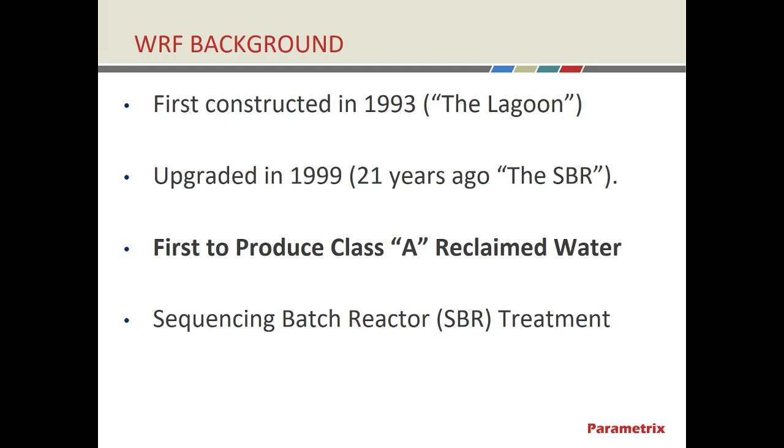I mentioned the letters from ecology. If those continue, you're at risk. I don't know that this is going to happen, but you're at risk for fines or potential third-party lawsuits, and some type of enforcement actions from ecology, growth restrictions, or basically just the inability to treat wastewater, which I think is the biggest concern here.

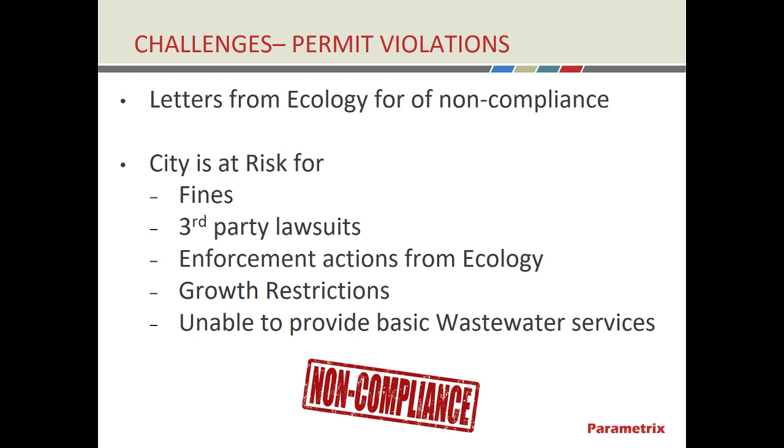So in terms of permit violations, in order to discharge to the river, you have to have a nitrogen limit of 10 milligrams per liter. The red line is the permit limit. I apologize for the small scale. January of '15 is where the graph starts, and it goes until June of this past year, June of '19. Those are monthly reports that your staff has to turn into the Department of Ecology every month. So that's exceedances for nitrogen and turbidity, which is particles basically in the wastewater.

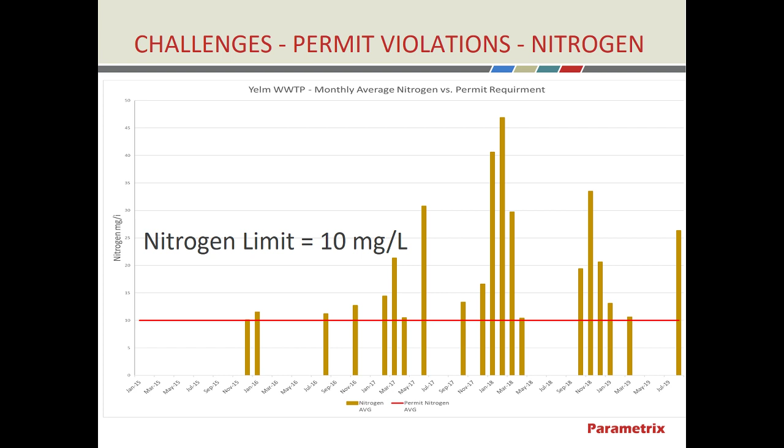Turbidity - in order to be a reclaimed water producer, you have a turbidity limit you can't exceed. Those are your exceedances for turbidity, and coliform. You can see that even right up until the end of the period, you're still having issues.

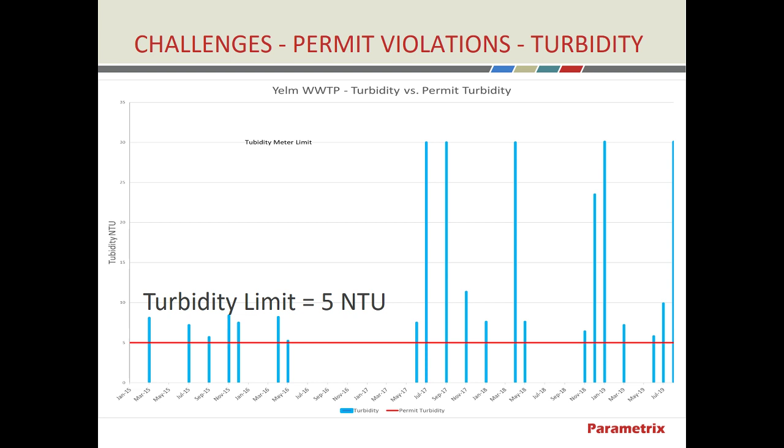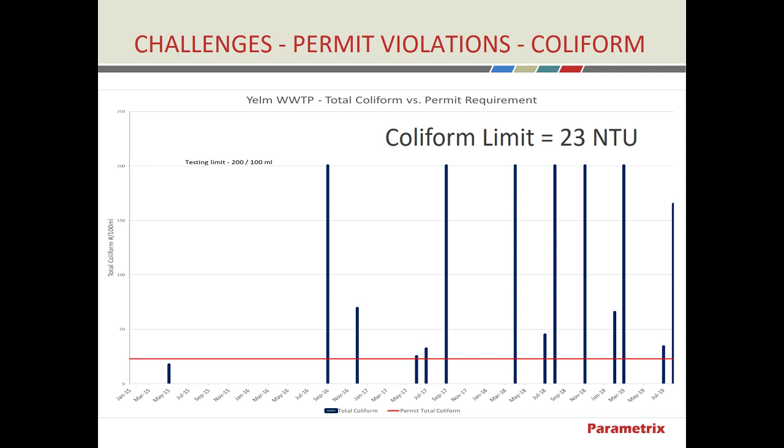Throughout the process, though, we have been working on some things to try to manage this, which I'll explain in a second. But when you have an aging plant - some of the pump stations out there, part of the lagoon plant, are 27 years old. We'd love to design things to last 27 years, but they just don't last that long. When you buy a car, you do everything you can to take care of it, but sooner or later maintenance just starts creeping up and you're doing more and more.

You mentioned we were the first to have reclaimed water in Washington State. Were there any other cities or municipalities right after us, within 5-10 years or so? So right down the road, LOTT produces reclaimed water. So what do they do when their plant breaks down? Do they have issues? They have a much larger facility, so they have a larger staff.

They have a different process. Staying on top of it, though, from the standpoint of equipment, is also about having the ability to exchange parts. With an old car, sooner or later you reach a point where you just can't find parts for that car. And that's the situation you guys are running into.

So are we unique in the kind of how our plant runs then and operates? Yes and no - an SBR is a common process. We do a lot of work for the city of Orting. Orting also has a batch reactor that they're looking at right now, making major upgrades to as well. It's just at that age where it needs work.

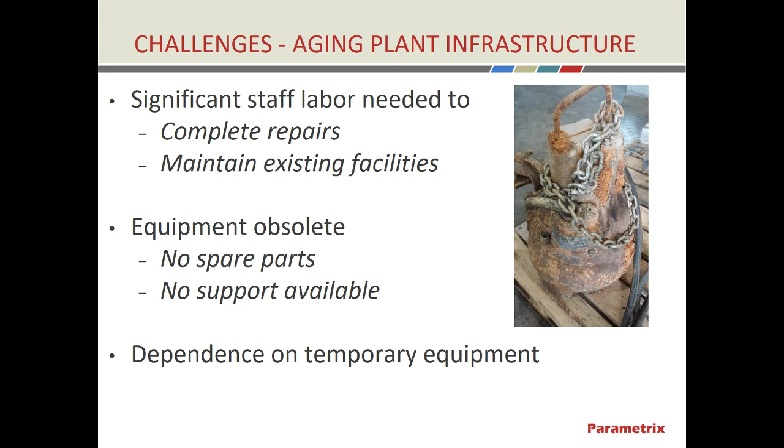You have blowers there that were part of the original equipment, and those are supposed to have a 15-year life expectancy, but we're at 21, 22 years with those. The pump station on the top left was part of the lagoon system that's 27 years old.

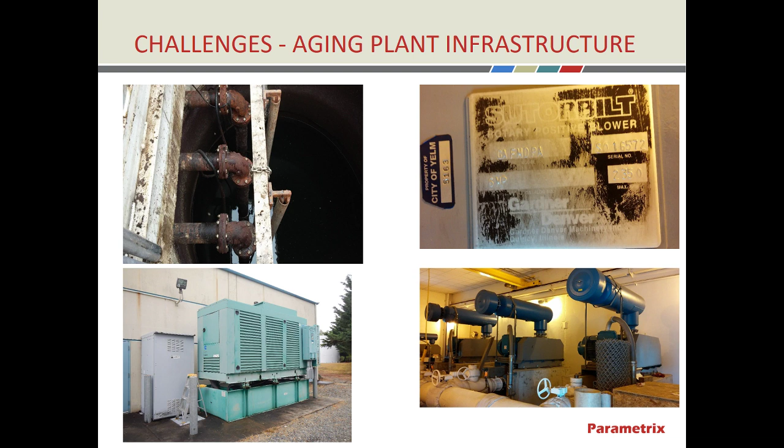You've got situations where valves on these systems are starting to snap. We've got valves that won't close all the way. There are 6 big valves that are part of the SBR process, 3 on the front side and 3 on the back side of the 3 big basins that hold wastewater. They're not closing properly now, and they won't seat all the way. When you can't close a valve all the way and you're supposed to be containing the wastewater to treat it, untreated wastewater is escaping. That's partially why we're seeing turbidity and coliform exceedances, because untreated wastewater is just slipping through.

Those valves are expensive to fix because they're big. The valves on there, are those butterfly valves on the outside? Those are pneumatic butterfly valves.

Is there a reason we're using... Yeah, I saw that they were butterfly valves. I've seen them, I was trying to ask you. Is there a reason we're using butterfly valves instead of something like a gate valve? Well, a plug valve is really what you probably should be using. Yeah, that's why I was asking.

When I went to check out the site, they said it was recommended to use butterfly valves originally, but I know when you're cutting water, you don't want to use a butterfly valve because they don't seat well. They were cheaper at the time. It's just that it was inexpensive then, but now it's becoming a problem. They're not inexpensive to fix, but it was more inexpensive than a plug valve would have cost.

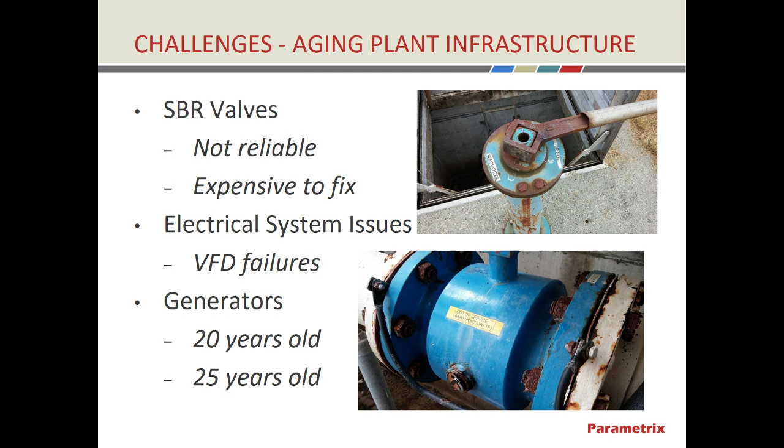But you've got variable frequency drives out there that are past their end of life cycle that are failing and causing pump failures and blower failures. Your generators are past their service life. You've got meters in the system that you can't remove or replace because the flanges are rusted together, or the meters are actually inaccurate. I think we have a pretty good handle on what's flowing through that plant, but some of the metering is not correct.

Like I mentioned, we've worked hard to try to work with staff to come up with different ways to keep the plant going to meet permit. We went from 2-basin operation to 3-basin mode, I think you've heard about that. We assisted with seasonal improvements, since it's harder to complete the process when it's colder in the winter. We also looked at options associated with perhaps denitrifying using the filters in addition to the SBR basins. We've messed around with pH and magnesium hydroxide to help improve settleability.

Chemical feed pumps have been replaced, and that's helping. They did major filter maintenance a couple of years ago. It was hard to do, but that has helped a little bit.

As part of this last project, we did upgrade the reclaimed water pump station. That was a facility that was literally ready to fall into the contact basin, and that is working well now. We've provided improved controls to Bill and Jeremy and the staff so that they can modify the SBRs and have a process that they can customize.

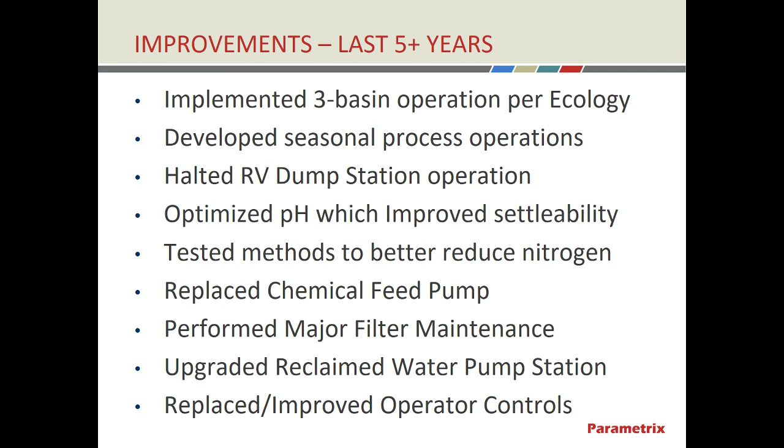That system was basically a black box when you bought it. It worked magically, turning blowers on and off when the algorithm inside it told it to, but now staff has the ability to do that themselves. Again, they're still having challenges to properly treat wastewater.

I'm going to talk a little bit about plant capacity. Maybe before you start, just... sure, since it's flowing wise. Any questions about just the existing facility?

The current design capacity of the plant is 0.83 MGD, 830,000 gallons a day. One of the things the state requires is that you start making improvements once you're at 85% capacity, or 0.71 MGD.

Flows right now are 0.55, but based on the flow projections we've done, based on population projections, the flow is expected to be at that 0.71 in 5 years. 5 years will be here before you know it, so the plant is running out of capacity.

So in addition to age, you're also running out of capacity. And the closer you run up against that capacity, the harder it's going to be to meet permit, along with some of the other issues that Brian talked about earlier.

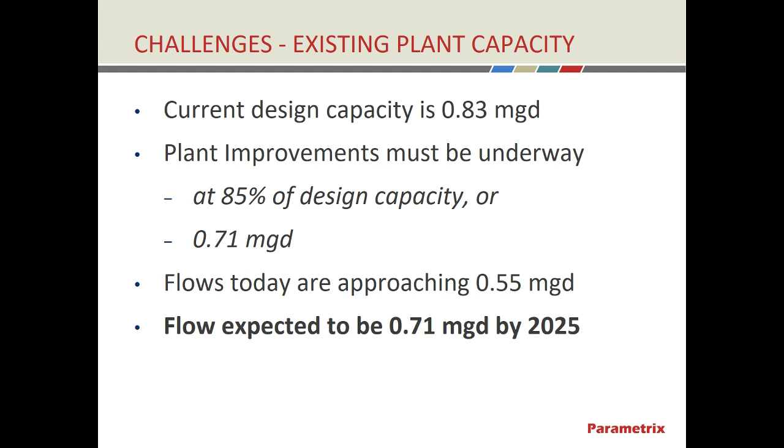So the improvement goals, there are several things. We expanded the planning horizon to a full 25 years, out to 2045. We want to replace aging infrastructure and improve energy efficiency. Like you saw with those blowers, they make blowers now that are 40% more efficient than what you have, really reducing the amount of electricity the plant needs.

Decrease the cost of operation and maintenance, increase the design capacity, so by 2030 we're at about 1 1/3, then just under 2 by 2045, and also be able to produce Class A biosolids by 2030.

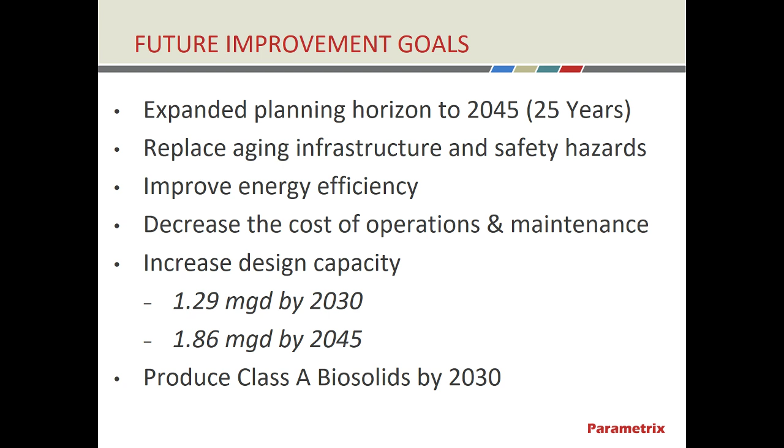One of the things we did was have ranking criteria for all these different alternatives. I'm not going to go through all of these, but you can see we wanted to minimize cost, maximize safety, and minimize disruptions during construction. Why? We've got to keep the plant running, and we've got to keep meeting permit even though construction is going on.

We want to make sure we maximize use of existing facilities. This is a big one for me, because even though you have a lot of things like valves and pumps that are beyond their life, concrete lasts a lot longer. You've got some big tanks out there made of concrete that can be reused. So one of the things the team really looked at was how we can use that existing infrastructure and not build it all new, because you've made an investment in that, and we might as well use it.

Finally, reliability, and then maximizing current technology.

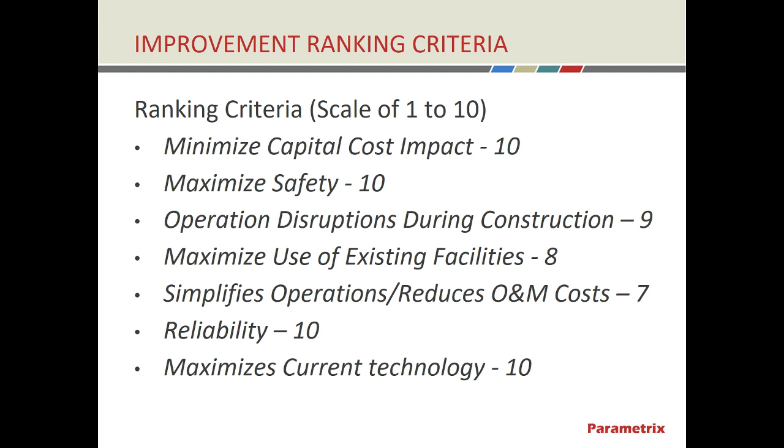Steve talked about the MBR. I'm just going to explain a little bit more since we're going to get into talking about an MBR. A normal treatment plant is biological, you have bacteria. A regular plant depends on gravity, goes into a big clarifier. In your case, since it's a sequencing batch reactor, it's done in batches. It settles, and the bugs settle to the bottom.

With a membrane, kind of think of it like a coffee filter, okay? The grounds stay on one side of the filter and the liquid goes through. Well, the membrane's similar, except the holes are very, very small. In fact, they're so small that if you pretend the bacteria is my fist, the holes in the filter are this little circle. Bacteria don't go through, okay?

So it's an effective barrier to bacteria. And what you get on the other end, you can't tell from those pitchers of water, it's that clear. It also reduces your disinfection needs because, again, the bacteria can't get through. You still have to have disinfection, the Department of Ecology requires that, but it is an effective barrier. Some states now, places like Nevada and California, are actually looking at giving a credit to plants that have membranes.

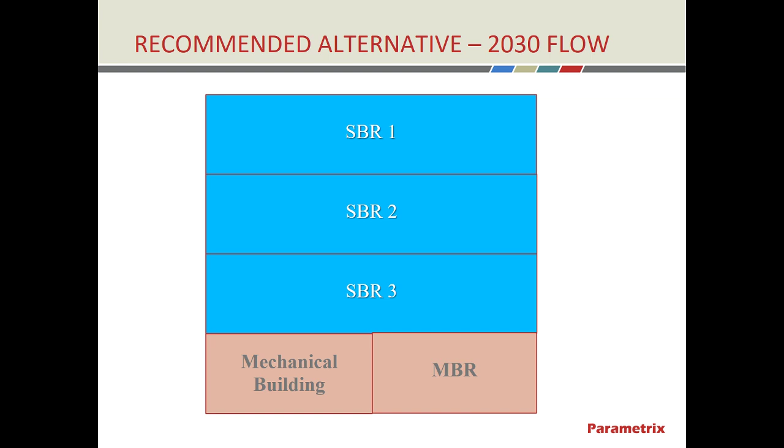But how do we keep the plant online? I'm going to step through that. First off, we're going to get the MBR running. Then we're going to operate SBR 2 and 3 at a higher MLSS — that's a fancy word for more bugs in the system. Mixed liquor suspended solids, it just means more bugs. But because we're using MBR, we can operate the system at a higher level because we're not trying to settle it by gravity.

While that's operating in that mode, we're going to go into that first tank and do the necessary changes for the ultimate system. Once it's upgraded, it will be under operation, and we'll do the second tank. Then finally, we'll have the 2 process tanks for the 2030 flow, and the third tank there can be interim equalization because you do have flows that vary.

Yes, sir, what's kind of the timetable on completing one tank? One tank would probably take — we haven't done the design yet, but I would take a guess anywhere from 3 weeks to a month. Because they have to go in, they have to tear stuff out, they have to do demolition. There's some walls that have to be built. So I would take a guess about a month.

Okay, thank you. Can you go back like 2 slides? So what worries me is, because you said our systems are really aged, they're failing — what happens if an SBR goes down while we're retrofitting and now we're down to 1 SBR? Well, you could even say that now — you need 3 to operate, so if you're out of 1, you're in trouble now. Yeah, I know that, we still have 2 operating, but here we'd only have 1 operating in this scenario.

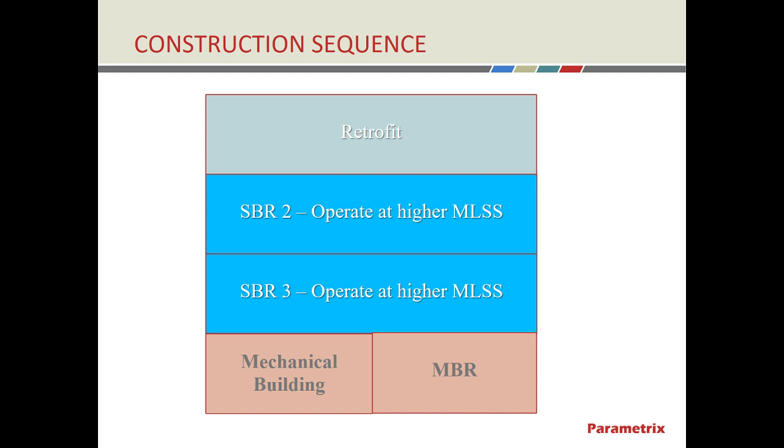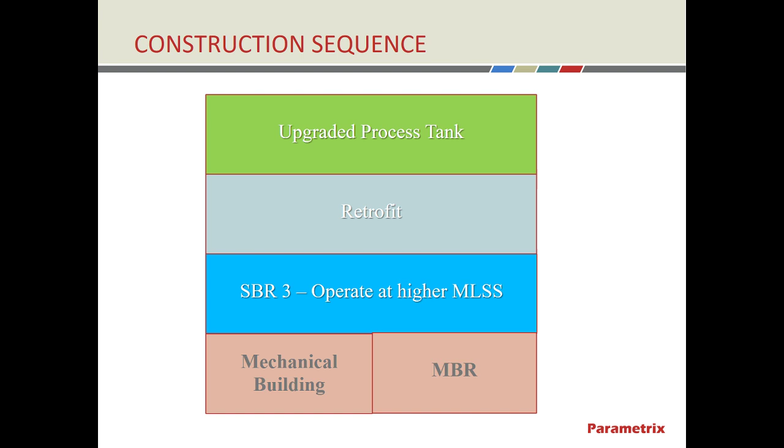Yeah, because the temperature has a big impact on the process — people are at their houses in the winter, right? Yeah. And then for the 2045 flow, we would add another MBR tank here, and then probably use that other part — so we really only need those 2 process tanks for the 2045 flow. You have enough volume in there because, right now you're running the amount of bugs in there around 2,000 milligrams per liter. That may not mean anything to you, but we're going to operate it somewhere between 9,000 and 12,000. So that's just a whole lot more bacteria in there doing the work for you. So we don't need excess volume. Okay.

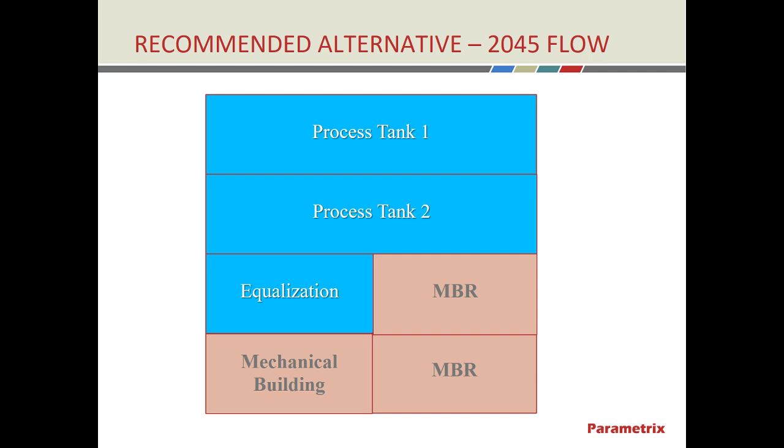Now, this alternative—I already talked about the water. I was at a plant one time where we took a water bottle and filled it with effluent. We were accused of taking that from the water plant, not the wastewater plant, but it really was from the wastewater plant. It's very tough to tell. Sometimes during startup it'll have a slight tint, but once it's up and running, you cannot tell it from tap water.

So it's compatible with future upgrades for future regulations. Someday there may be other things that have to be added on. This type of plant is very modular and can be added on to in the future, and we could potentially produce drinking water quality out of this plant.

There are plants that do this, not necessarily in the United States yet, but Singapore is probably the most famous. They take wastewater, run it through a similar process like this, and then have additional treatment at the end—ozone, ultraviolet light, reverse osmosis—and put it back into the drinking water. In fact, it's so pure that chip manufacturers in Singapore are buying all that water.

Chip manufacturers like Intel have to have ultra pure water, so the Singapore water is making such a high quality product that chip manufacturers are buying all of it. If you ever want to look up NEWater, Google it and it'll talk about what they do there.

Again, we're using existing concrete infrastructure—an investment we can continue to use. This will allow permit compliance because we're going to have more bugs, we won't have to worry about settling, and we'll be able to meet permit. It also addresses future capacity demands that you're going to be faced with.

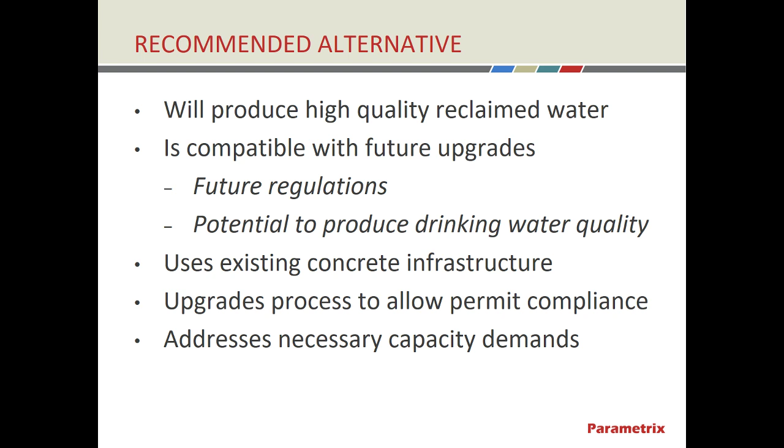You made the comparison to a coffee filter, and any of us that drink coffee know you can't use a coffee filter for very long before you need to replace it. So my question is, first, how long does this membrane last before it needs to be replaced, and what is the replacement cost of these membranes?

There are different membrane materials. I have a ceramic membrane with me tonight—do you have the sample, Doug? There are also different types of membranes. Pass it around.

They explained this the other day—even though this looks solid, if you put a drop of water on here, it disappears; it goes right through and comes out through the middle. Then they put it under pressure: bacteria stays on this side, the water goes through. Magic—better than magic, because it's real. Hold it over your phone... he's doing it, you broke it, you're going to make a mess. It's not instantaneous, it just sits and then you blow through it. Yeah, it takes pressure, it does require a little bit of force. Just wait for it, wait for it, it'll make its way through.

I'd like to thank you for that visual with the coffee filter. When I did the first Kubota membrane, it was for the Tulalip tribes, and that's how the chairman of the tribe described it—he said, this is kind of like a giant coffee filter. I've never forgotten that. But this is just one type of membrane; there are different types.

That option is basically to continue to operate the way that you're operating, replacing all of the aging parts that have lost their reliability. However, as it's mentioned, it's least likely to succeed. We think you would continue to be challenged to meet permit requirements doing that.

It would pencil on paper, but because of the challenges this facility has with BOD and with temperature, even though we would do our best to account for temperature, I think the existing basins would probably fail. It wouldn't improve any additional capacity. No, you wouldn't actually get additional capacity either.

Thank you. Cody, can you say what you said again? So the second part I said was that if we built the new membrane plant, they would be using the old one, the SBR, while the new one's built. Once that's finished, we'd switch it over, and then in 10, 15 years, if we need to, we can go back and change the SBR to membrane technology, or retrofit or upgrade to accommodate even more growth.

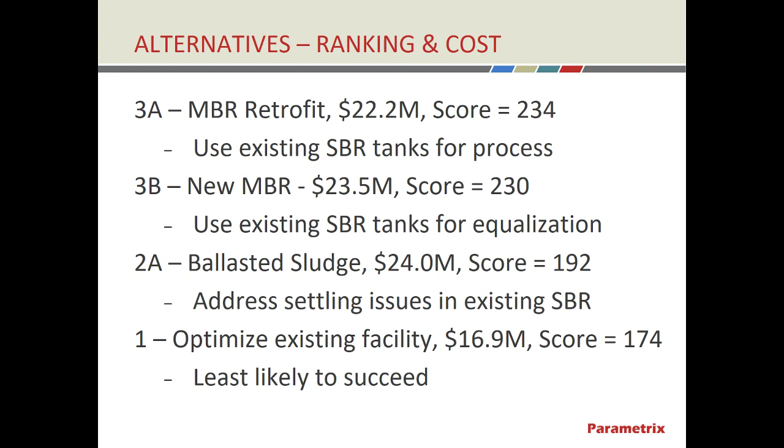The plant would already be there, instead of waiting and starting immediately to work on increasing capacity so we're not faced with a capacity issue down the road. My thought process is if we upgrade the current one and we have an explosion in growth, we're going to be looking at buying new land and building a new system anyway in 10, 15 years at the rate we're going. I'm not saying that's for sure, I'm just saying that's a possibility.

So it seems more logical, for only $1 million more in this scenario—obviously we'll have to break down the prices and see what the numbers are—it seems more logical, and we're not making decisions here, but it seems more logical to build a new facility and have the backup there while we're building it, in case anything goes wrong, and then also have the ability to upgrade it at a future time in 10 to 15 years for future generations as the city continues to grow.

Build a new facility, and retrofit the old facility later, because the new facility is already built, instead of having to purchase land in 15 years and build a facility when construction prices are $60 million. So I think that makes sense, but...

We're taking a lot of the bones out of that original plant though, aren't we? We'll still have to have a huge capital improvement. Yeah, the one thing to keep in mind is with the new MBR, that's enough for 2030.

With the MBR retrofit, you have enough tankage there, you don't have to build any more tankage for 2045. So we can't use the SBR anymore once the MBR is built? No, all I'm saying is, I mean, you could, but equalization is also very important.